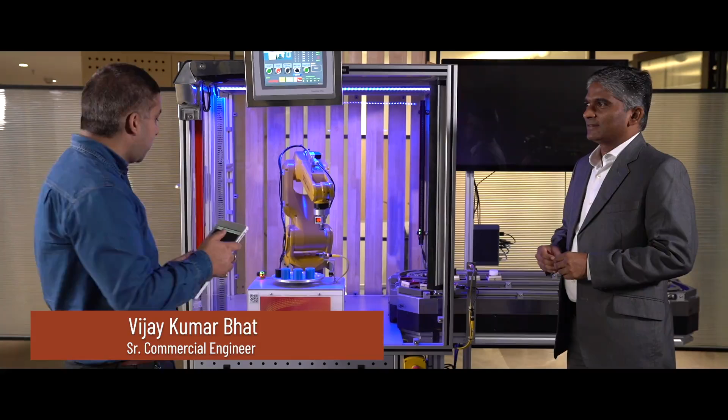To demonstrate that concept, we have a QR code out here. So what I'll do is I'm going to scan the QR code. And you can see that we have the screen available. This is the mimic screen that's available out here. I can start the machine right here. From your tab? Yes, from my tab. It goes with the countdown and the machine is ready to go.

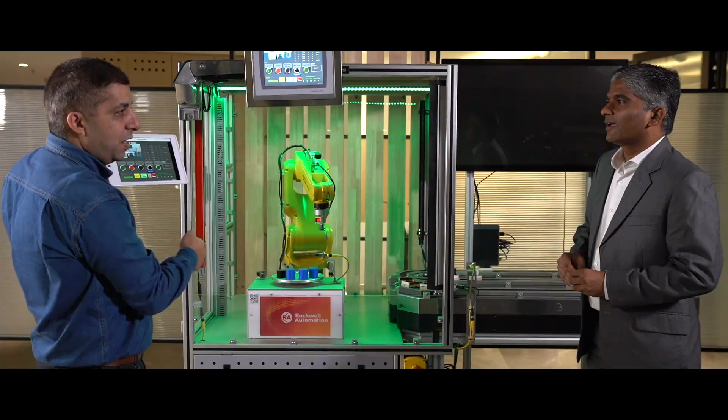Great. So this is the concept of mobility we have been talking about, and we are actually demonstrating it: just having a tablet in hand, I can operate a machine, I can get the screen, and I can operate it. Wow. Using a QR code concept. Fantastic. We can do much more. Let me take you to the next machine and show you the remote capabilities also. Please. Let's go.

So Amit, let me show you the power of remote connectivity here. We have an RFID scanner here, and I have a maintenance access and an operator access. Based on the access given to the person, we can access the machine which is at some different location and use a different machine HMI out here. So I have an operator access, I scan it, and you can see that I have an HMI of a different machine here.

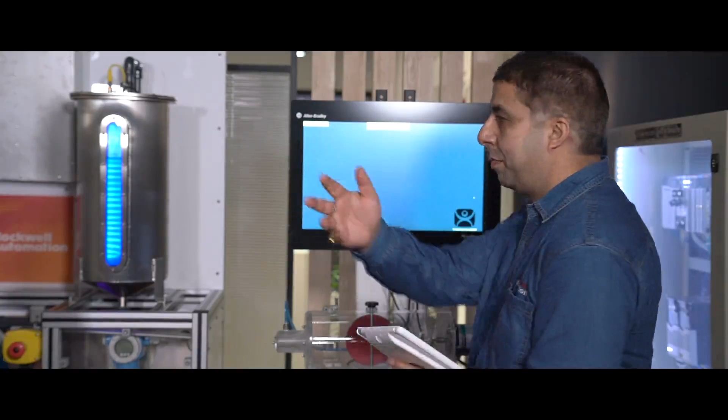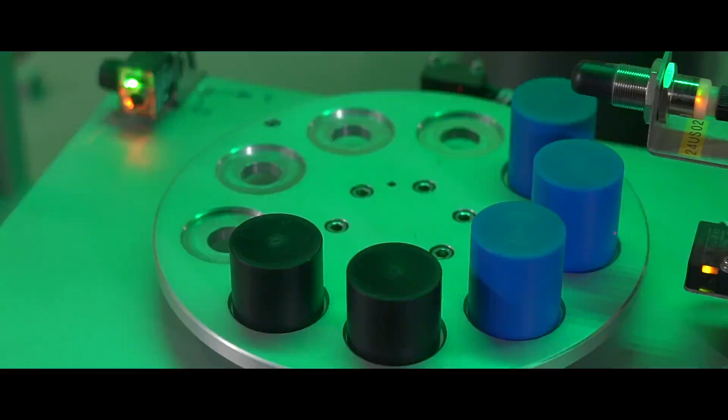I can start and stop it. I'll first reset it, and I'm going to start it. Now the countdown begins and the machine will start shortly. You can see the machine is now ready to run. I can also stop the machine right from here, just by issuing a stop command. So the machine is stopped. So this is the power of remote connectivity.

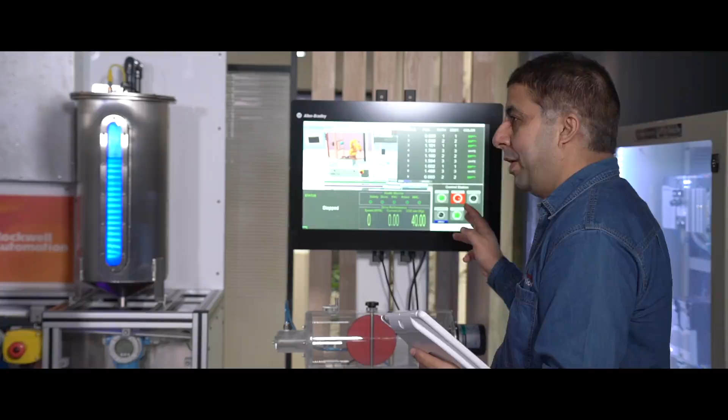Is there anything installed here? There is nothing installed here. It's a zero client. There is no software, there is no license in it. And it is very safe; it is end-to-end encrypted. And if you have this infrastructure available at home, you can access it right from your home also. Oh, great. That's fantastic. Wonderful. So this is not enough. I'm going to show you something more. Let me take you to the next kit.

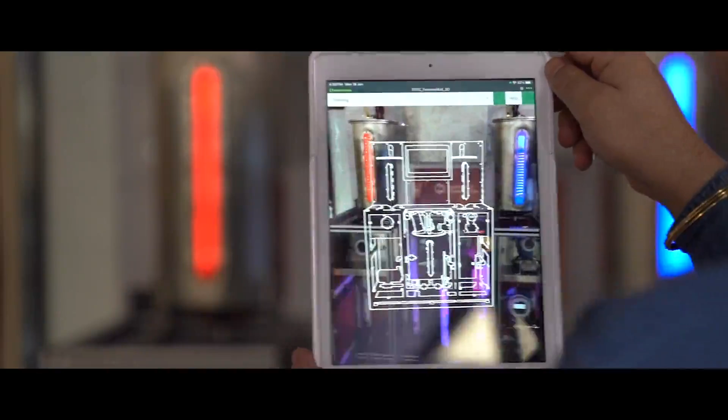So here we have a machine, and now I'll show you the concept of augmented reality. I'm accessing this machine. So here we show the power of augmented reality. I can scan this whole machine, and you can see that we have different gauges showing the different parameters of this machine. If we have a new operator or trainee and want to train him to locate the different parts of this machine, we can also do that.

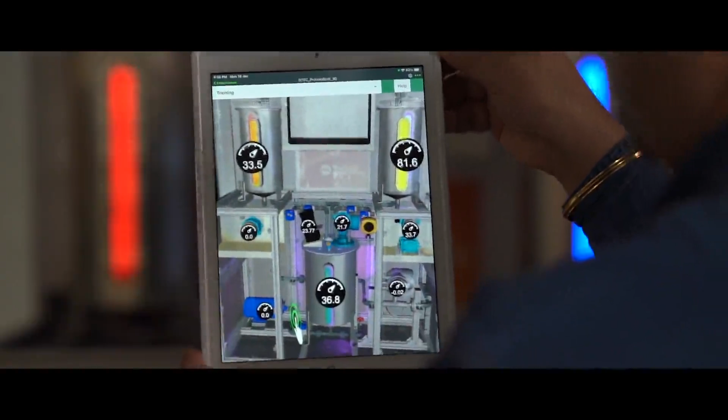Like I can go to the mixing tank here. I can select and go to the agitator here. I can also see where the feeding pump lies. So he can see the location of different equipment in the machine using augmented reality. So that's the power of the augmented reality concept. Great, Vijay. Thanks a lot. Thank you for that insight.

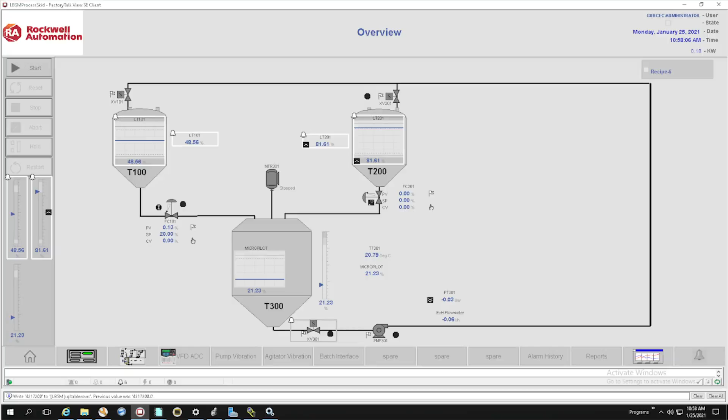Most welcome. So what you have seen is the power of mobility, remote connectivity, and security. For that, I have a subject matter expert, Vikas. Hello, Amit. Hi, Vikas. So today we are going to show you the integration of the PlantPAx DCS with one of our process skids. We have different third-party instruments like E+H instruments.

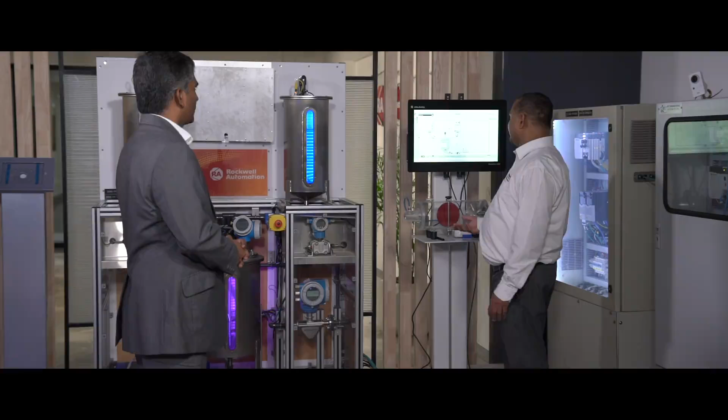So I will just open one of the screens. Through integration we are able to get all the diagnostic data. We can also have remote maintenance. In this case, we can do a heartbeat test, which runs a test on the different components like the coil and the transmitter, and then generates a report. Oh, it's instrument health. Yeah, so we can remotely monitor instrument health.

Then further we can have integration with power components like a VFD, like in this case. This is our 525 drive on the pump. Then next we have the integration with the overload relay.

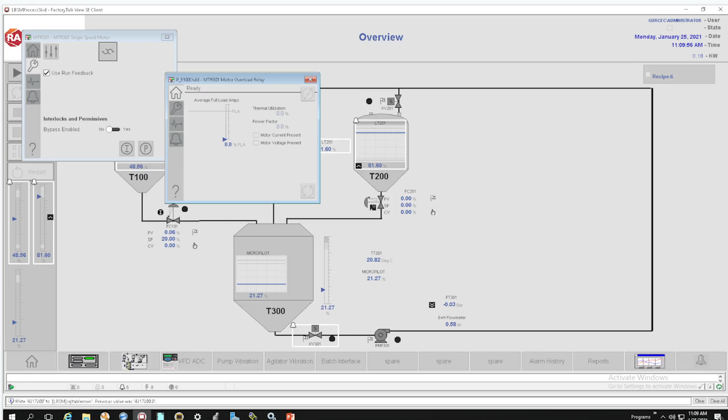Overload relay. Yeah. So this is the integration with power components. Similarly, we have also installed a condition monitoring system on the pump and the agitator. So I will just start the batch.

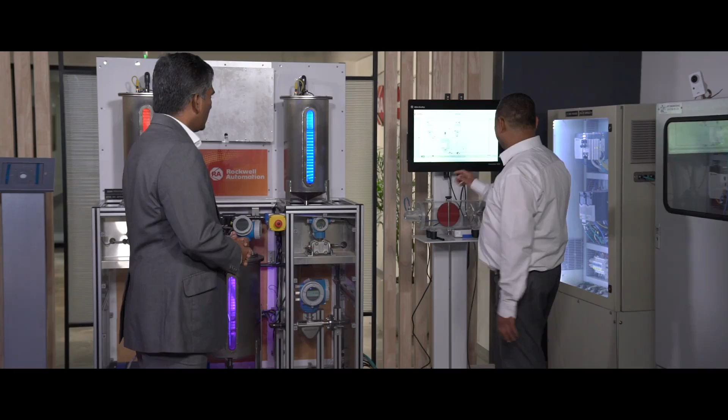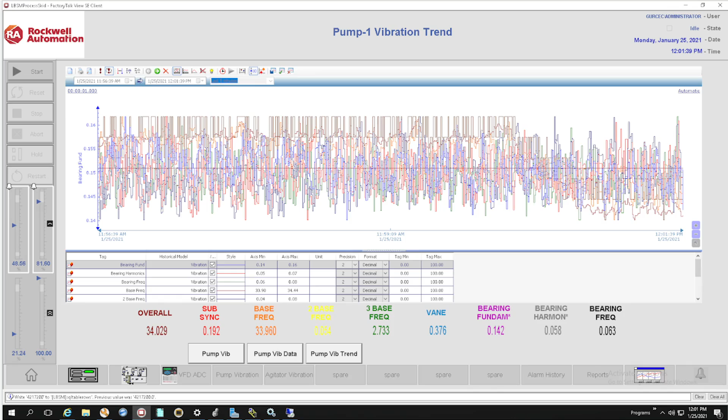Okay. So basically we can monitor different parameters from the condition monitoring system. I will just open the trend page where we can see the vibration parameters for different base frequency, etc. So this is basically the integration part for the PlantPAx DCS with the various equipments.

So let me touch upon the next topic, that is the security aspect. Cyber security is a very important aspect whenever there is an integration between the IT and OT layer. So I will just showcase how Rockwell has a defense in depth approach to maintain cyber security compliance. Basically we have our controllers that are CIP Security enabled, where unauthorized access is disabled.

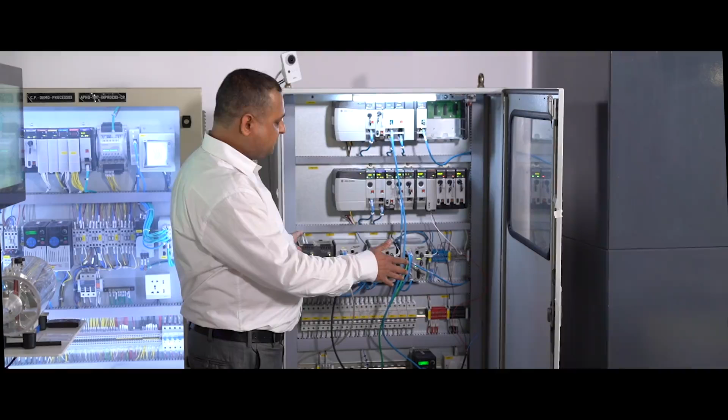So if anyone has access to the panel and tries to change the mode of the controller, then an alarm will be detected and logged, and that shows the operator that there has been a security breach and unauthorized access has been done. Great. So I will just reset it.

Similarly, at the network level, at the switch level, unused ports are already disabled. Okay. So whenever there is unauthorized access, if I try to use this cable to access the live port, if anyone tries to access through the live port, then also we get the security breach, because only the authorized system can access through this. Only authorized persons will get access.

Yes. You have a lot of instruments, a lot of power control devices, a lot of condition monitoring hardware. These are generating a huge amount of data. Where is this data going? This data is going to this industrial data center, where we have implemented the virtual environment. So basically we are logging all the historical data and all the SCADA control, etc. on this virtual environment. Great. So let me just guide you to the command center.

Yeah, so this is our command center, where we have a video wall where the data is coming from different plant sections. Like you have seen the process skid, next is the HMI from pick and place, and then the IoT platform. So this is a tile view where I can have the data from different plant sections, and if I want to go to a different screen, I can select one of the screens and it will explode. Oh wow.

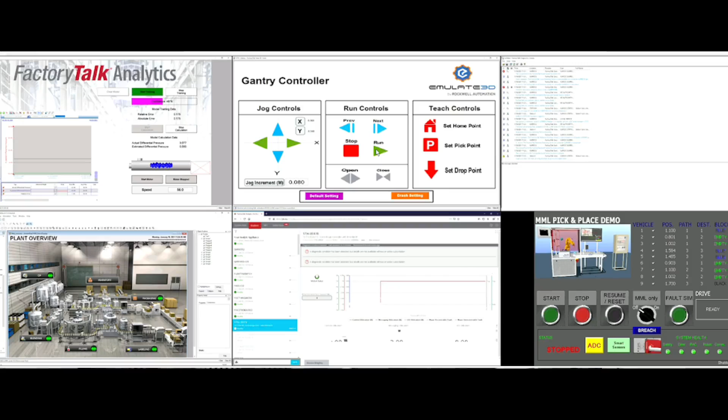So next I will again change it to the tile view. So I can select different plant sections and then I can operate them. So let us sit and then have the demo on PlantPAx DCS. Sure. Yeah, please have a seat. So let me just change the tile view to my DCS demo. Yeah. So this is a chemical demo for our PlantPAx DCS. Okay.

Yeah. So this is how a typical chemical plant will look, having different areas starting from the raw material handling. Then we have the prep tank area. Correct. Next we have the product storage. And then we have a batch process in the reactor area. Yeah. Correct. Other components like the dryer and then the tank farm. And next in the separation area we have the continuous process. Correct. Let me just take an example of the batch process.

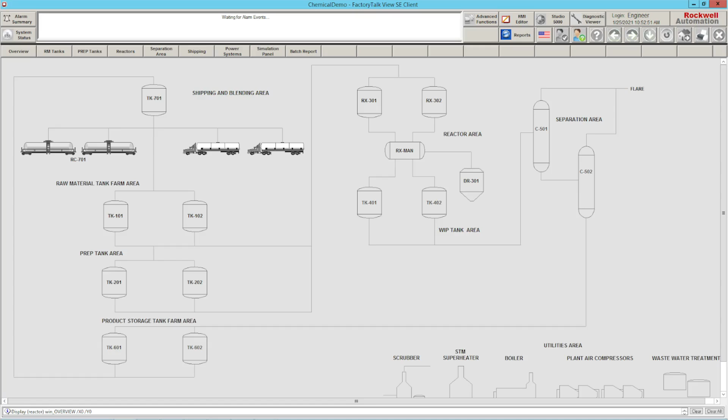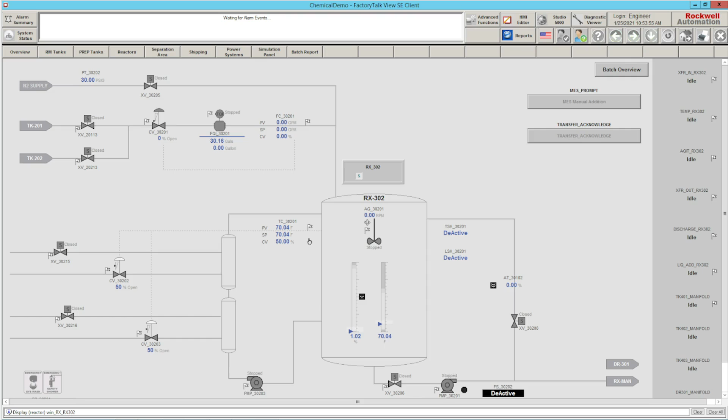So in our PlantPAx DCS we have an S88 compliant batch solution. Okay. So this is an example of a reactor where we have the status of different phases. These are different phases of the reactor. I will just go to the detail of a batch overview where I can monitor the batch running on a reactor. Okay. I have the option to create a new batch where I can select a recipe from the master recipe database.

So in Rockwell, similarly, we have a solution for integrated safety. We can provide a SIL level controller for systems where we require integrated safety. Great. So that's all I have for this chemical plant DCS demo. Oh, great. Great, Vikas. Thank you for your demonstration.

So now, let me bring an expert on analytics to explain how the analytics solutions are going to work on our DCS. The subject matter expert with us is Anshu. Hi Amit. Hi Anshu. What do you have for us today? Okay, so let me demonstrate the analytics part. Sure.

Okay, so starting with the analytics, as you can see, the first dashboard talks about the overall health of all the hardware connected to that particular system. All? Yes, all. Everything which is connected and communicating over EtherNet/IP. So as you can see, this particular device can handle up to 100 devices. This particular device currently has 53 devices connected.

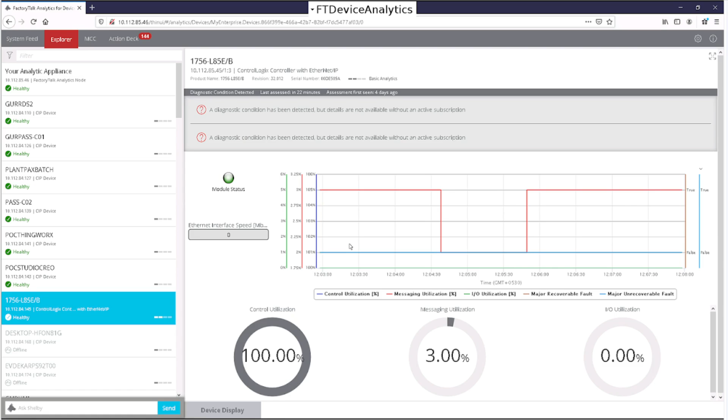For example, there is another controller which gives you another set of data, a ControlLogix L72 controller, wherein the information collected is free I/O memory, free logic memory, total CPU, idle CPU. Great. And not just that, it also has another set of devices like Ethernet switches. So you can see that.

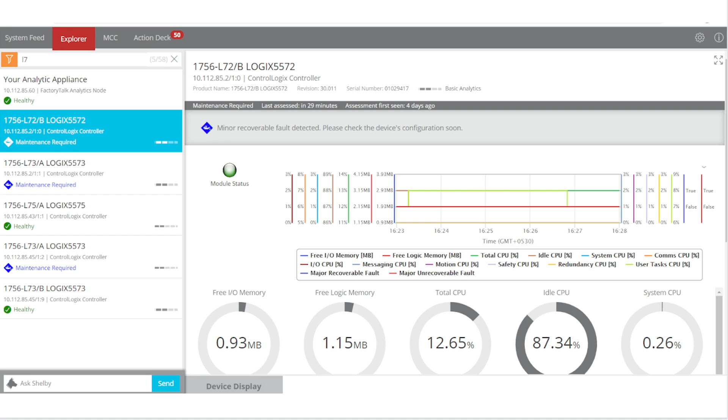When it comes to different types of devices, the analytics slightly varies. For instance, in the case of a switch, the information it provides is the total bandwidth utilization and the internal temperature of the switch, which can come in very handy, specifically for the maintenance personnel.

And not just that, it also has a feature of providing you the action decks. When I say action decks, whenever there is an issue with a particular device connected to that diagnostic setup, the diagnostic conditions detected for all the devices which need some attention from personnel are very clearly listed over here.

In addition to that, there is a feature called vote down and vote up. If you find this particular fault or action deck is not relevant to your system, you can just vote it down, and the moment you vote it down three times, it just moves out and it will not appear over here again.

Okay. So this was just a quick overview, a glimpse of the device analytics, which basically brings the health-related information of all the hardware connected to a system. Correct. Now let's move on to the next topic, which is basically the predictive analytics part.

So when it comes to predictive analytics, as you can see, this particular demo talks about a series of connected pumps. And this demo is based on predictive analytics, and it also implements a machine learning model, which brings the advantage of predictive analytics.

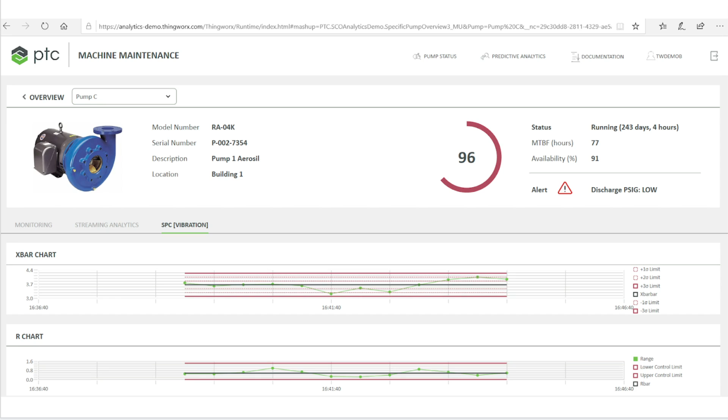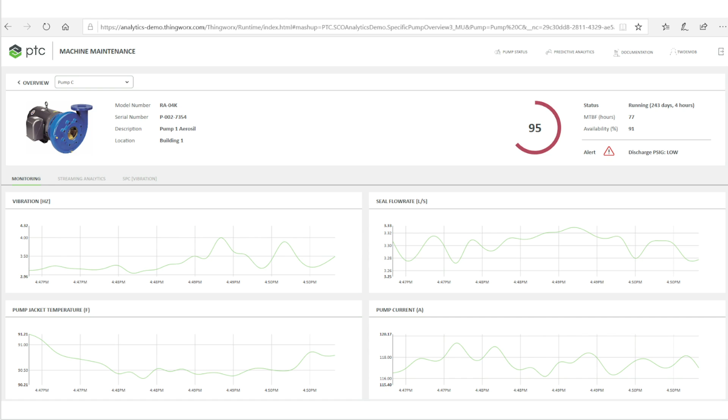So the parameters are plotted over a graph. This is right now real time? As well as historian also I can have? Exactly. So this one is the real time, and when it comes to streaming analytics, it provides you the raw incoming data, wherein you can find out the min, max, mean of all the critical parameters.

And not just that, the standard deviation from the normal values, and not just for one parameter, for all the parameters like current, seal flow rate, jacket temperature, vibration. All you have to do is click on any of the tabs and you can monitor that.

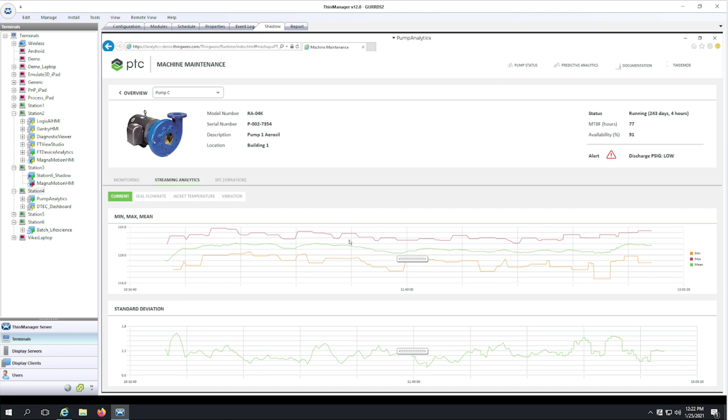Anshu, what you are describing right now is a pump model. Would it be implemented for a compressor or a reactor or some kind of an... Sure, why not? The same model or concept can be applied to any of the assets.

Whether it is manufacturing area or process control area, the same concept of machine learning can be applied over there. Wow. Fantastic. Right. Great. So now let's move on to the next part of this particular demo, which is the most important one, which is the predictive analytics part.

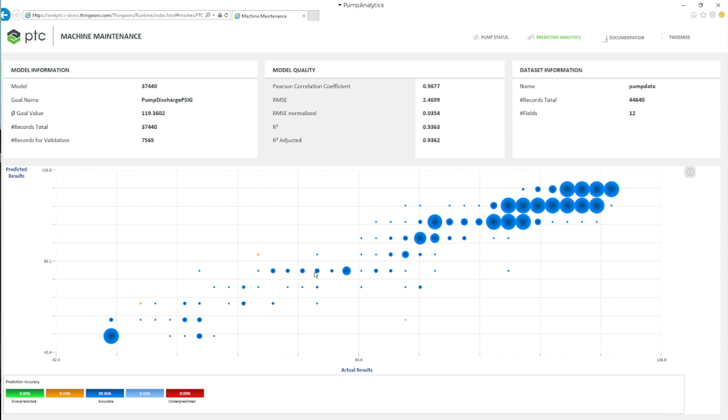So you can see that the Pearson correlation coefficient value is close to +1. Okay. So that shows the confidence, how good that particular model is. So this is plotted on the data we have available in our plant. Exactly. And you can see the accuracy level, it is 99.96% accurate. That's amazing. Right. So that was a quick glimpse about the predictive analytics, referring to a demo.

Fantastic. Fantastic. Yeah. Thanks, Anshu. This is a great demonstration. Thank you very much. You're welcome.

So now you have seen the analytics part. Now let's move to a virtual reality section. Hey, hi Farhan. Hi. You're supposed to be in the factory. So we'll go together. Is it? Yeah, let's go inside our factory.

You are about to enter the only staging and development facility in India. Here, we engineer solutions which are supplied to domestic as well as international customers. This facility is spread over 48,000 square feet and employs about 250 people. This facility offers engineering, staging and testing of process automation panels.

On the first floor of our Sahibabad facility, we have the engineering center. Here, over 100 engineers carry out design and development of project deliverables. Here we also have an advanced development lab, where we develop prototypes to demonstrate our technical expertise on Rockwell products and solutions. To enable our engineers to develop customer-centric solutions, this lab is equipped with the complete Rockwell product portfolio.

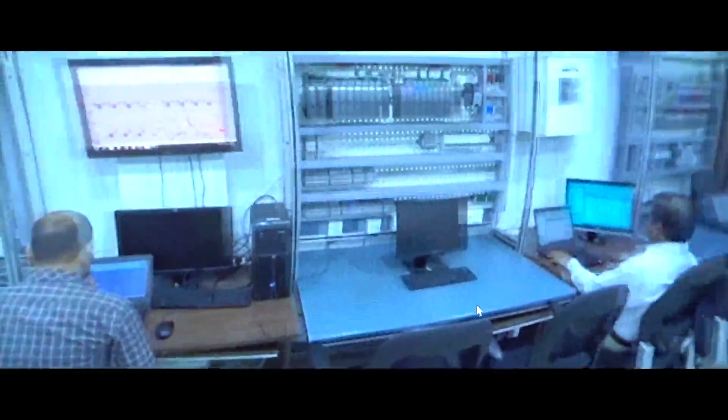The main panel assembly area is spread across 5,700 square feet of the ground floor. It is capable of delivering 150 cabinets at any given point of time. This facility also offers total capacity of 2,500 cabinets per annum. The entire assembly and wiring activities are carried out by a highly skilled workforce following RA Global Workmanship Standards.

Our panel staging facility is spread across 2,800 square feet on the ground floor. Here we can stage 1,200 cabinets per year for integrated testing and demonstration of the complete system to our customers.

On the ground floor, we also have the Local Solution Center, or the LSC. It is an advanced panel shop designed for fast-track delivery of pre-configured standard drive panels. We are able to support our customers with a target delivery cycle of 7 to 22 business days. The LSC is spread across 2,000 square feet. It has dedicated meeting rooms for visiting customers.

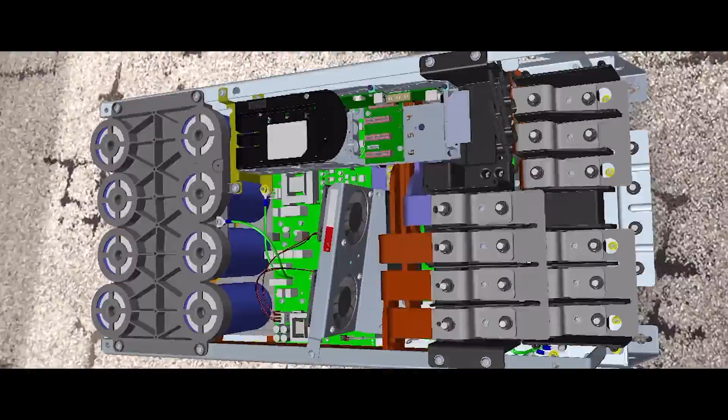As you see, we are getting guided instructions to first remove the front top cover by removing the 4 screws. Next we'll check the DC bus voltage. It has to be 0 volt at the guided location. Third, we will disconnect the jumpers to ensure that the jumpers have been removed and isolated from the system. Then we'll remove the capacitor cover.

We can see the location of the screws which have to be removed to remove the cover cap. Then we will carefully unplug the power terminals, as you can see here, it is highlighted. Then we will remove the fan assembly. You can see the screws for it, how we have to remove them. Okay, it shows the location also. Then we will remove the human interface module. So it shows the location of the screws.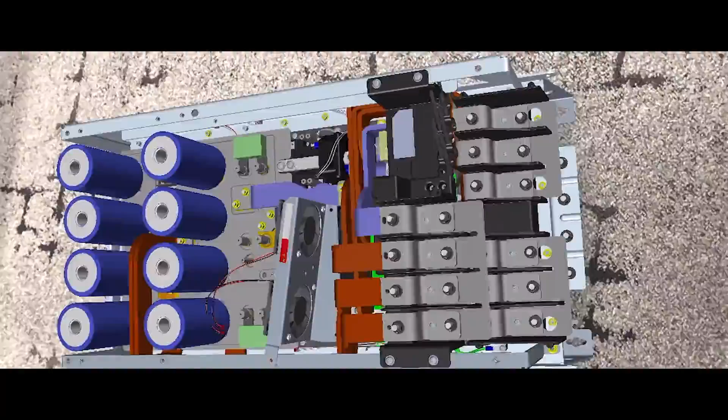So once the HIM is removed, we can access the power interface board. We find the location of the screws and connectors which are to be removed, and once they are done, we can remove the faulty power interface board in the drive, and then reverse the process to place the new power interface board on the drive.